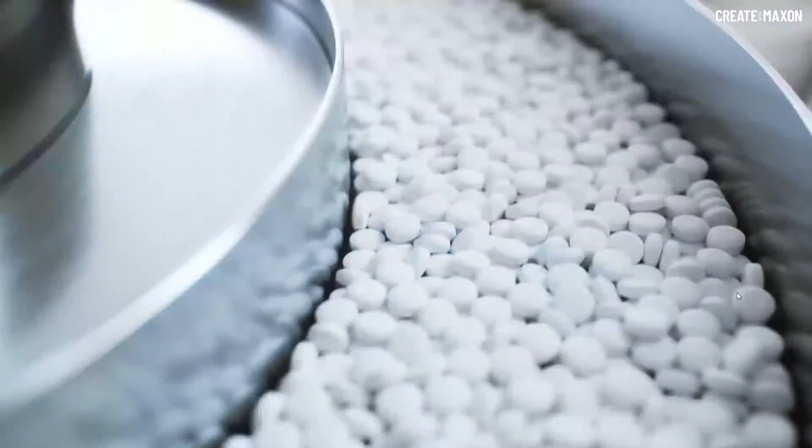Yeah, okay, that's it. I think what you can see here is that we are covering a big variety of things. You saw some Lego stuff we do, and then this photorealistic stuff, some commercial stuff. But I think what's most important to say is that all of these projects are commercial projects. So we are very focused on doing commercial projects. It's not that we have a lot of time to do spare time projects.

So our credo is learning while earning, to call it like this. And so we are always trying to get better with every paid project. I think that's a good way to go, because it's always good if you get paid for something and also can deliver great stuff.

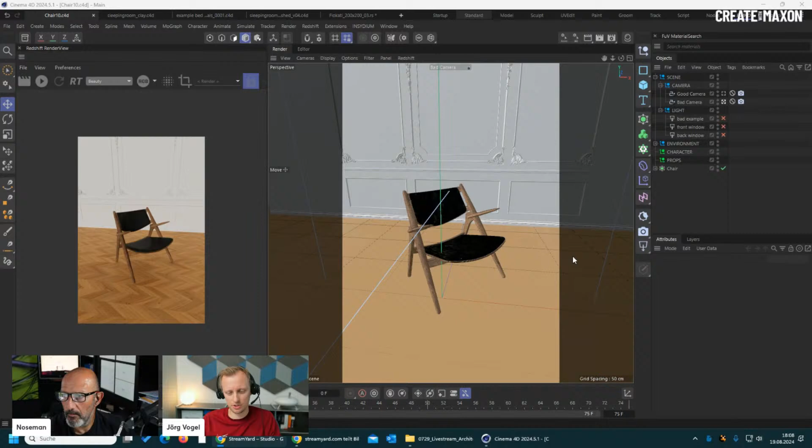So I don't know if there are any questions from you, Athanasios, or no. I will make sure to interrupt you if there are any urgent questions.

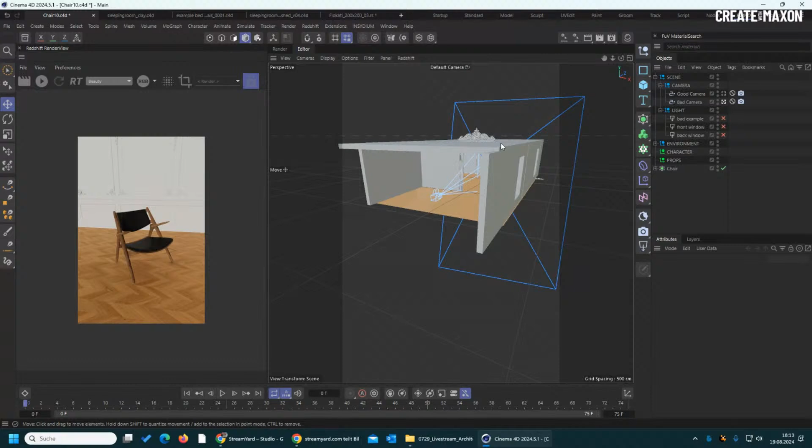So let's switch over to Cinema 4D so I can show you what I mean. I prepared a very basic test scene here. It's more or less kitbashed together. You have some ornaments here I downloaded from somewhere, we have the door here, and I placed this wonderful chair right in the middle of the room.

So in terms of composition, if we're now trying to make a good composition just from this chair, I just said, okay, we can go with a bad camera. I would call this one a bad composition. It's not showing anything. It's the standard focal length of 36. If you open scenes from other people, you always see they don't even care about the focal length. They just keep the standard and that's it, and then place it just somewhere so you see the chair. That's it. And if you now hit rendering,

we don't have light here at the moment. That's just the auto light, but you can see, okay, it's showing the chair, but it's not really showing anything else except for the chair. That's it. So we have now a bad composition, and now let's combine this also with some bad lighting. The recipe for the perfect bad lighting is to put it right in the back of your camera. So I prepared this here as a bad example.

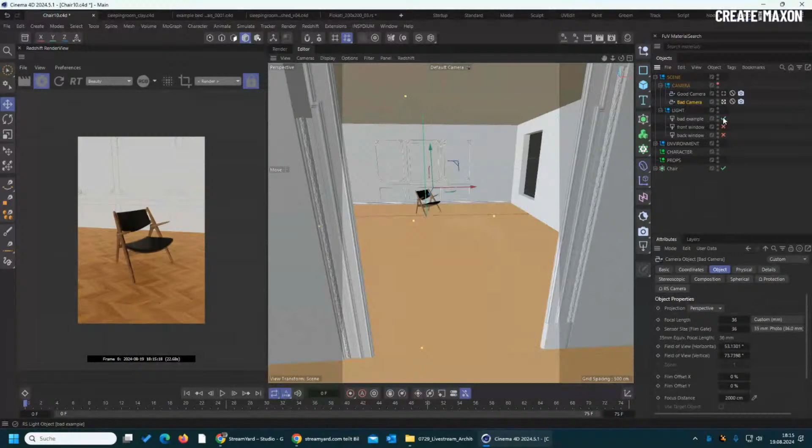So at the moment we have our camera, you can see it. We have the camera here, and the light is coming right from here, so it's mainly coming directly from the back. And what you can see now is we don't have a really good perspective, and we don't have really good light, because we don't have shadows; the object is just covering all the shadows we get, because the light is coming right from the back of the camera. That's not what we are aiming for. So let's go back and think about what could be more appealing.

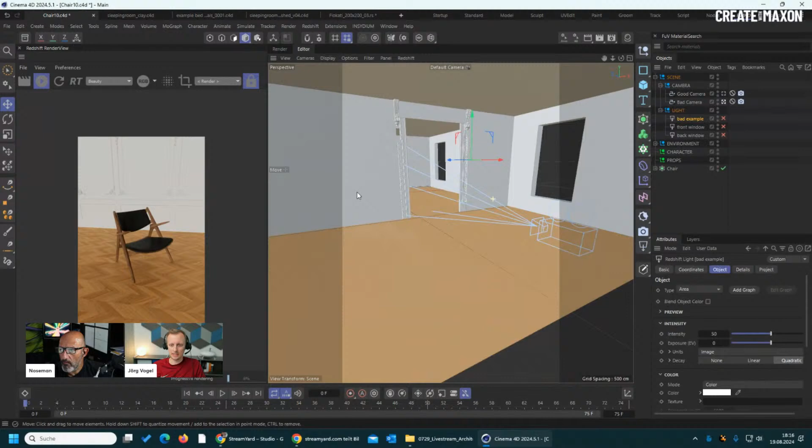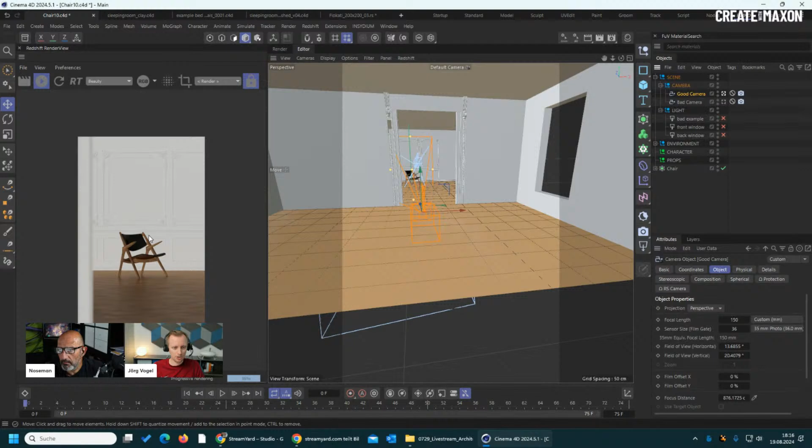A good way to get a good product shot, first of all, is to have a bigger focal length. So when we start here with a focal length of 150 millimeters, for example, and just get a little bit of the door frame here in the front, we get a little bit of depth of field, we get some depth into the image, and it's looking much more interesting. What also helps to get to those perspectives is the composition tab here. You can enable, for example, a grid, and center it, or you can use a golden section or triangles. Just some helpers that can help you get to an interesting composition.

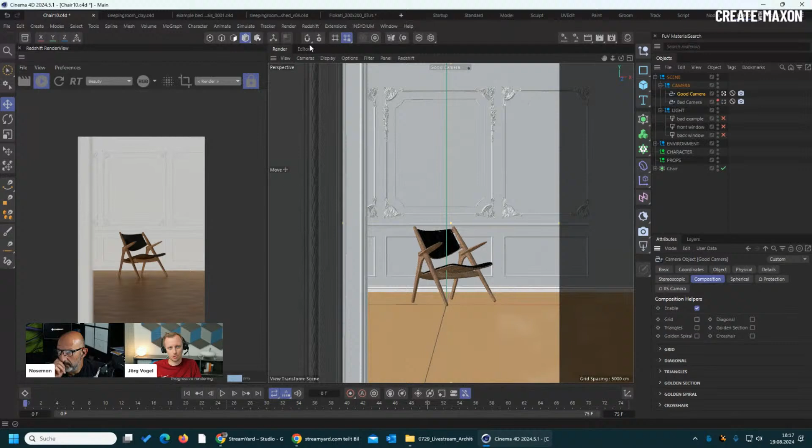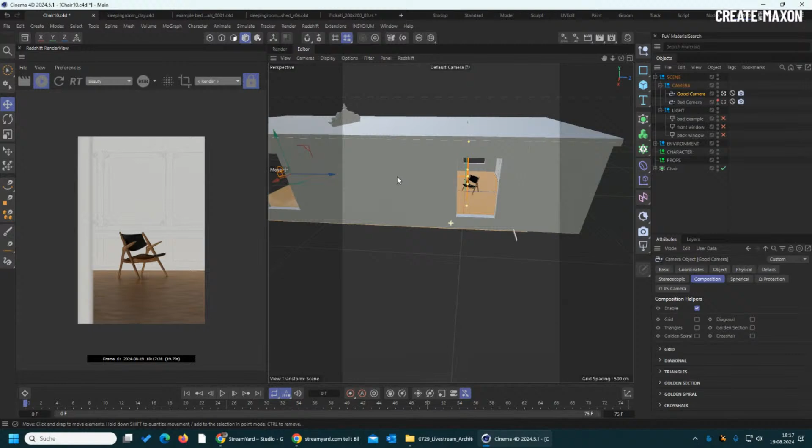So now we have this. We still have auto light, and what we said is point 2 after the composition is the lighting. So what I did here is we have a window directly from the side, and I'm not telling you that you should always put a light from the side of your object, but it's always a good starting point not to put lights just somewhere, but put it 90 degrees to your camera. This is just a safe way, because most of the time it will give you a good starting point.

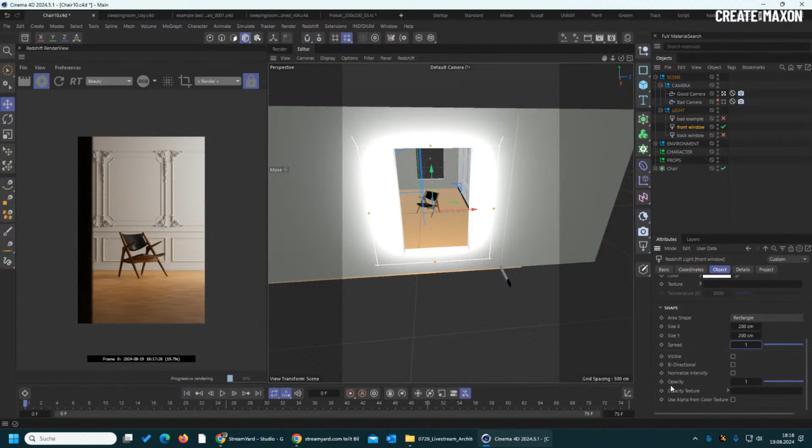So I will just turn on a light, an area light. It's nothing fancy. It's just an area light with not a spread of 1, but a spread of 0.5. You can see the difference. It's a little bit more focused on the chair, because the spread is not so wide. So we can do it like this, and now you see, okay, we don't have any light in this room, so it's a little bit dark.

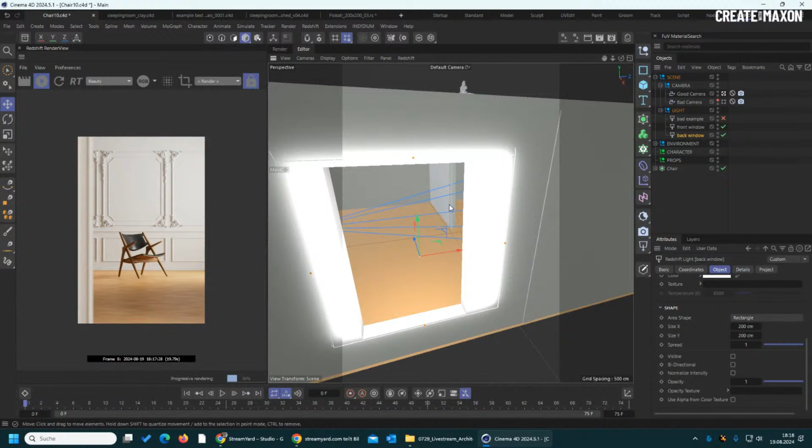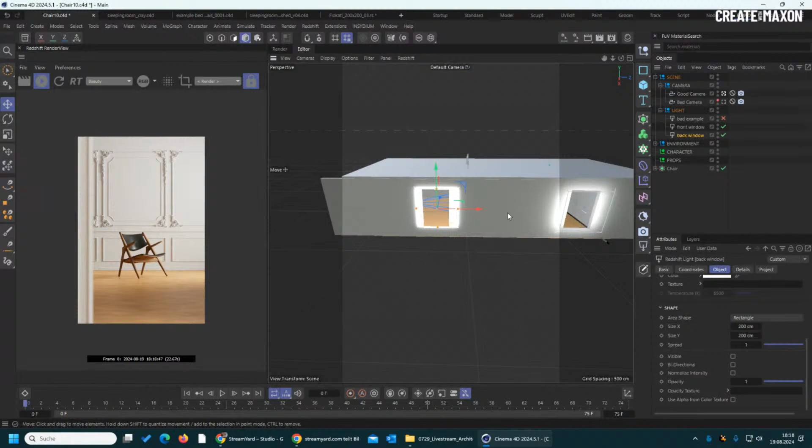So we have another light coming from this window, and it will just make this room brighter, and we will end up with a good composition and lighting. And it's pretty simple. Good lighting doesn't have to be very complicated. It's just 2 area lights and 2 rooms with 2 holes. You see it's even open here on the back. So I think it's really simple, and you see what's the magic about good composition and good lighting, because it's exactly the same object, but if you go for this, you get a completely different quality of image out of it.

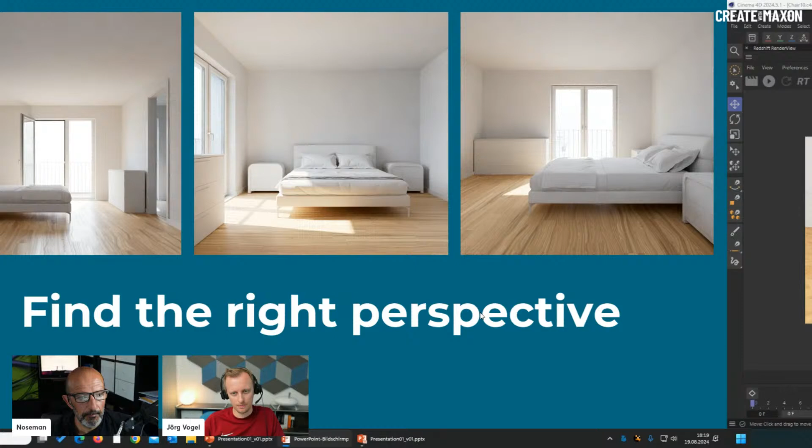So far for this one. So this was a little bit more overall, and I will now switch to this bedroom scene we saw here at the beginning. And just want to show you how we proceed with such a project. So let me again switch over here, and we will just start over with a blank scene. So I will really show you the basics how we work here.

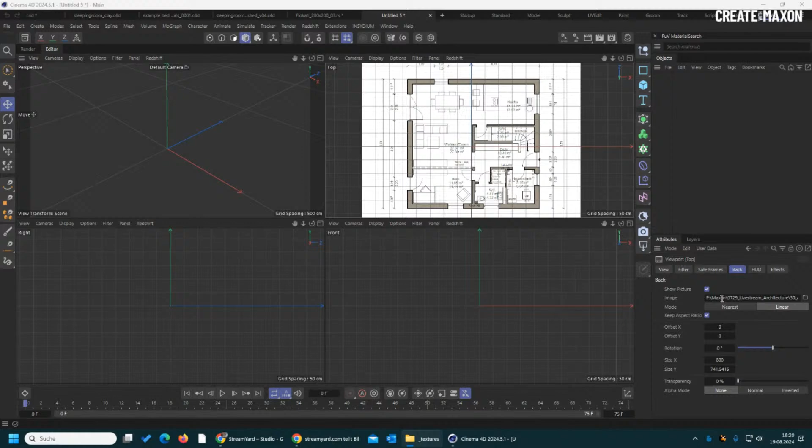So normally when you start, you need something like a blueprint. And you can just go to your top view, for example, and go to the viewport settings with Shift V, and then you go to back, and here you can, let me just go to this texture here, one moment. You can just put in some blueprint I prepared, and here you go. Now you can just model your stuff.

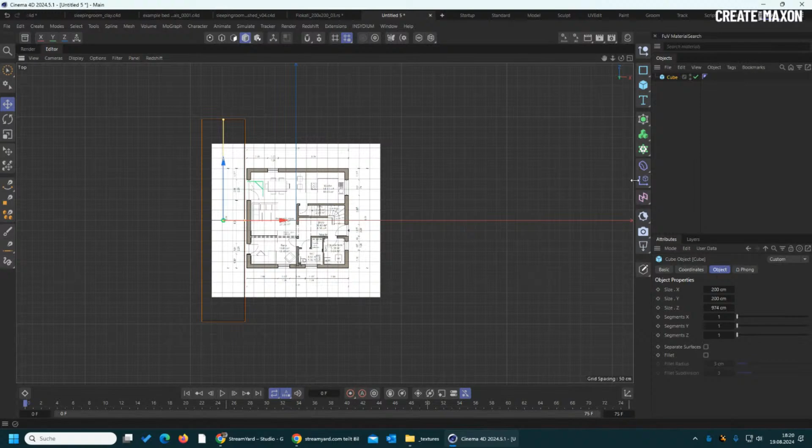The problem now what you have is that the scale is incorrect. So for example, we have here 9.74 meters. So if we just type in here 974, you can see it's totally off scale. We can now go here and adjust the size and the offset, for example. But we find this really annoying.

So what we did here is that we, let me just remove this one here, that we have a plugin written. It's called the BlueprintImporter. And you can just switch the standard alignment. You can say, put me an image into the luminance channel, and also which type of material you want to use. I would just use the old Cinema 4D standard material. And then we go to import image, and here we have the blueprint.

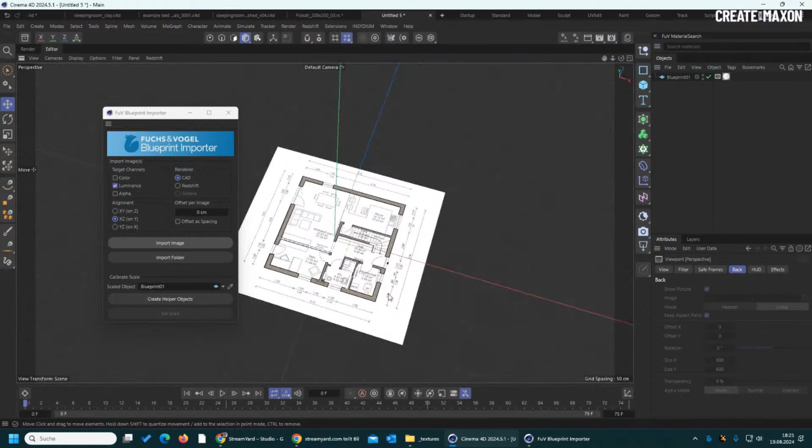And now we have a plane here with the material attached with a display tag. So you can also see it in the top view, for example. So it has an override here for constant shading. But we also have the problem here again that it's not scaled properly. But here we have the create helper object.

You can see it's just a null object that appears here, and we can just set it somewhere here, and we can set this one to here. So we have now measured the distance here, and then we say just set scale and set this to 974, and that's it. I think 974. We can just check it by putting a cube here, and you can see it aligns perfectly. So that's step number 1 to start with the modeling of the room.

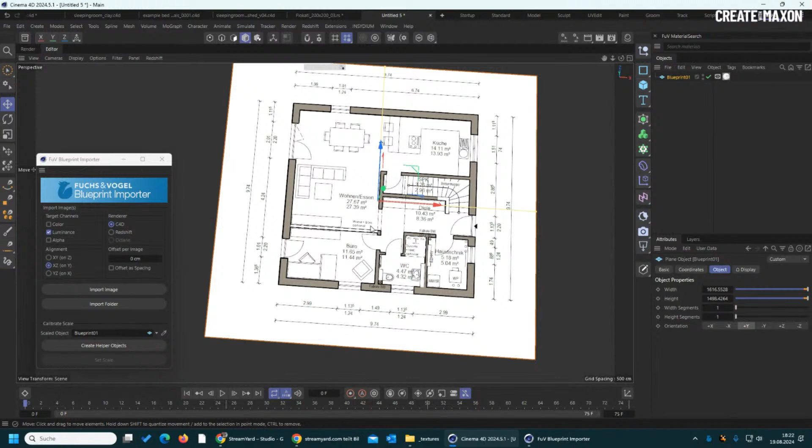And I won't show you how to model everything here. I would just show you how we would build one room, for example, because most of the time you won't show everything. It's more like, okay, let's show the office or the dining or the kitchen. So

we just do it by creating some spline here. So just really rough, go to the edges here and close the spline. So what you can see now, it's not perfect. You don't have 90-degree angles here. And I think the fastest way to align them is just to copy 2 of them and then scale them. Like you click on the smallest one and scale them down and scale them here. Yeah, as far as I can see, I was pretty good with those 2 because they are already 0.

You could also use the scale tool, for example, just scale it down to 0. So now you have perfectly aligned 90-degree angles. That's really good. That's what we want to have. And now we can align everything here. Perfect. Then we can create an outline. Perfect. Just need to adjust it here a little bit and here a little bit.

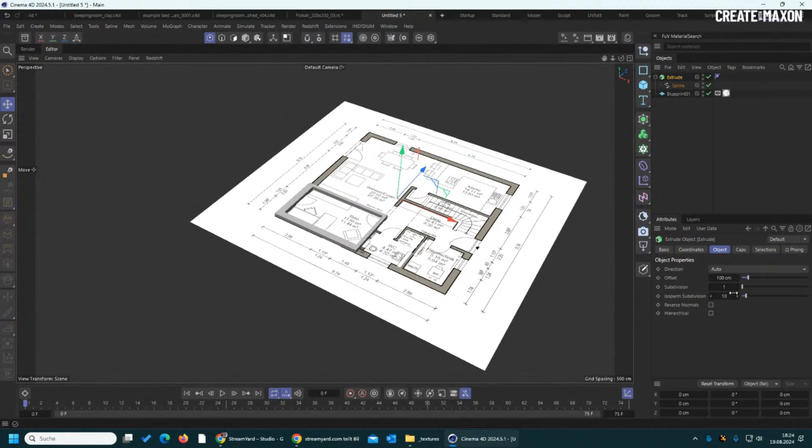And that's it. Let's put this into an extrude NURB, and let's say we have a height of 270 centimeters. And what you see now, it's facing in the wrong direction, but that is not really a problem because we can just reverse the sequence of the spline. And so we get it in the right direction.

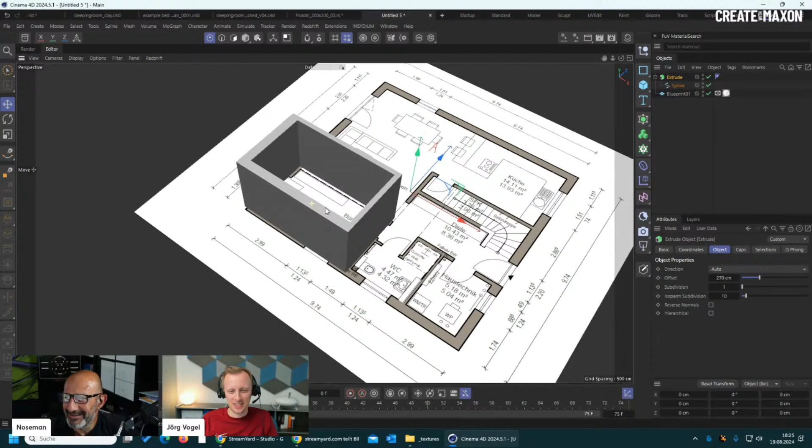One interjection here. Whenever someone says to our viewers, I'm going to put it into an extrude NURBS, that means they've been using Cinema 4D for a long time. That's my comment. Yeah, I'm old. I'm trying to get used to the new terms. Okay, so I'm using an extrude. Yeah, great.

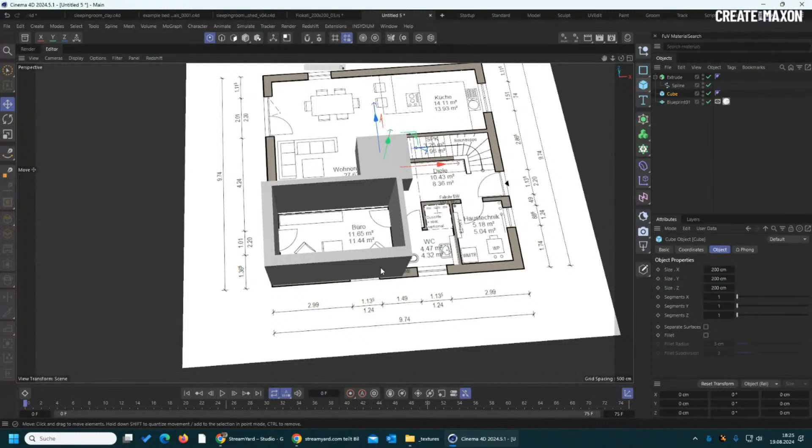So what's the next part? The next part is to put in some holes into the walls, like for the windows. And I think we have a door here, and this is also a big window, like a door. So we just get a cube, for example, and we see here that it has the size of 101. And I think the other one should be the height, so it's 220. And what you see now is that it's not aligned to the floor.

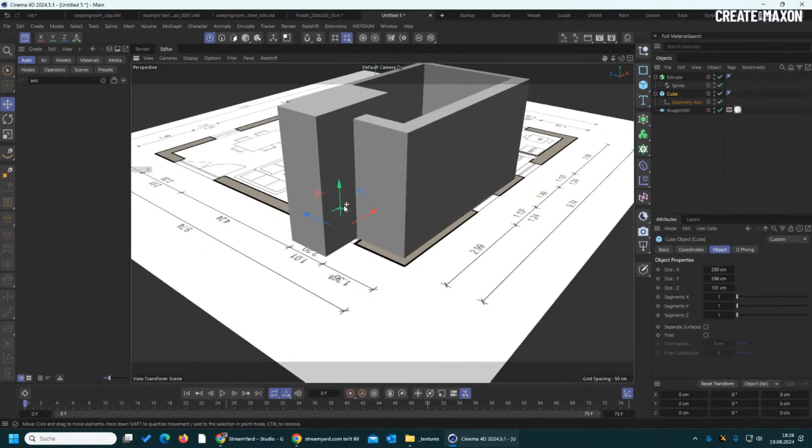So when I'm doing this, you can see it's always spreading in both directions from my axis. So there is a really handy capsule you can use. It's called Geometry Axis, and when you put it here, you can just set the Y-axis, so it's just an offset for the axis, but you keep your cube editable. So you now can just adjust the height without moving the cube into both directions. So that's really handy for something like this.

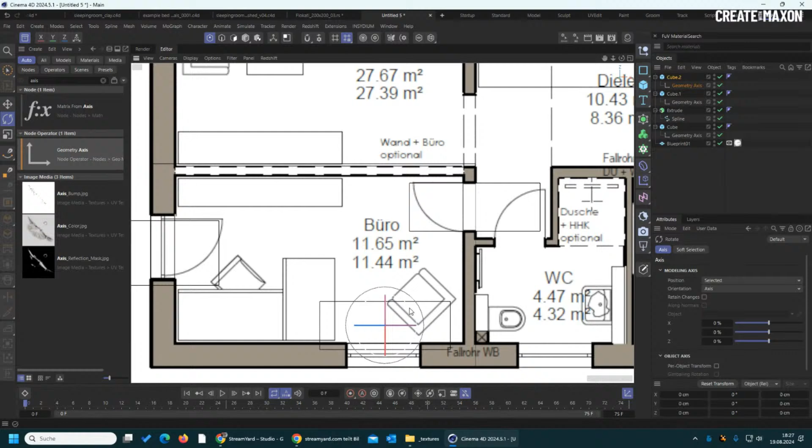So we have this door here. We have the door, I think it's around 75, if I'm right. And yeah, the height, we can just leave it. We will just make it a rough model. And again, we have here something like, I don't know, I think that's it. And in the height, we have 124.

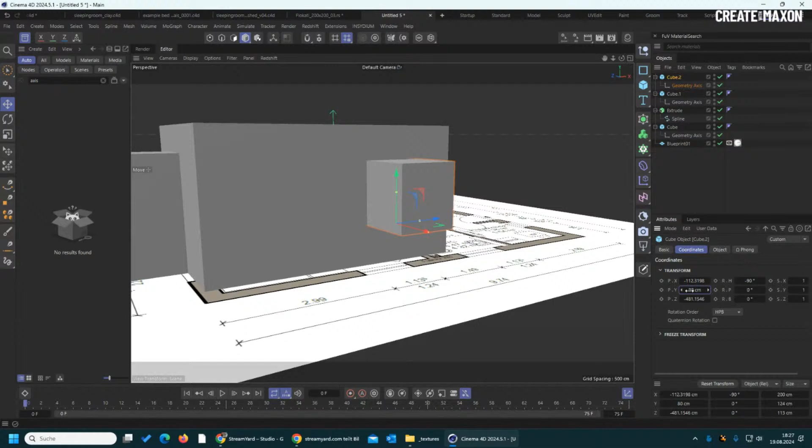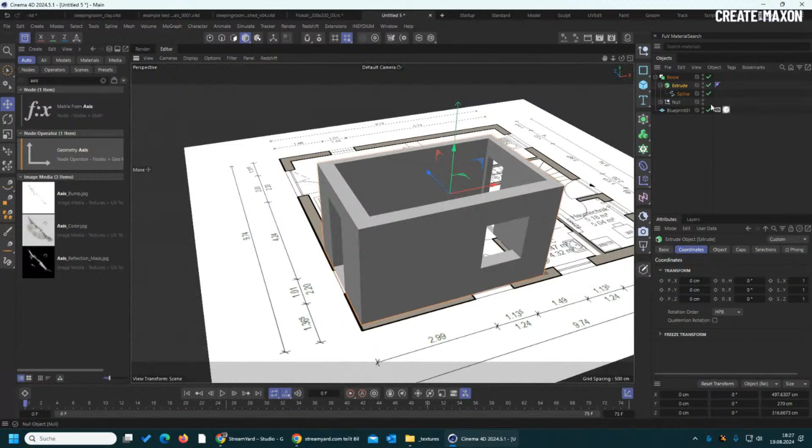Exactly, and I think the window will be at a height of around 80 centimeters. That's also really handy with this axis, because you can just move it from the bottom of the window. So we now take a Boole, and we can just group all the windows together, put them here, and put the rest here, and there we are. I would just pull them a little bit down, so we have gaps in between those doors here. So that's it for the holes.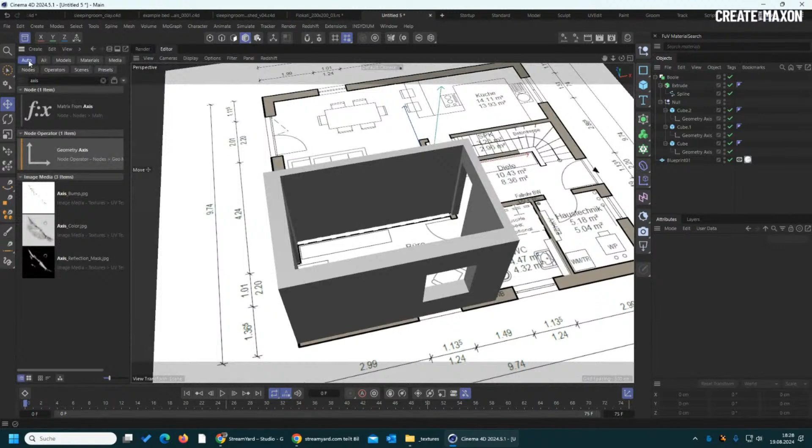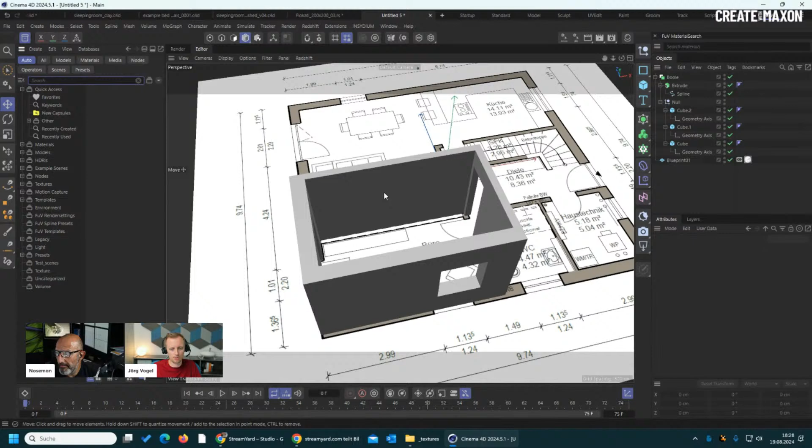I really want to highlight the asset browser here. A few years ago, there was not so much stuff in there you could really use for your commercial work, but it's a really growing library, with the materials, and also there are tons of new models. There are reworked old models for Redshift, so I really recommend looking at that first before you head out to, I don't know, TurboSquid or 3D Sky or whatever.

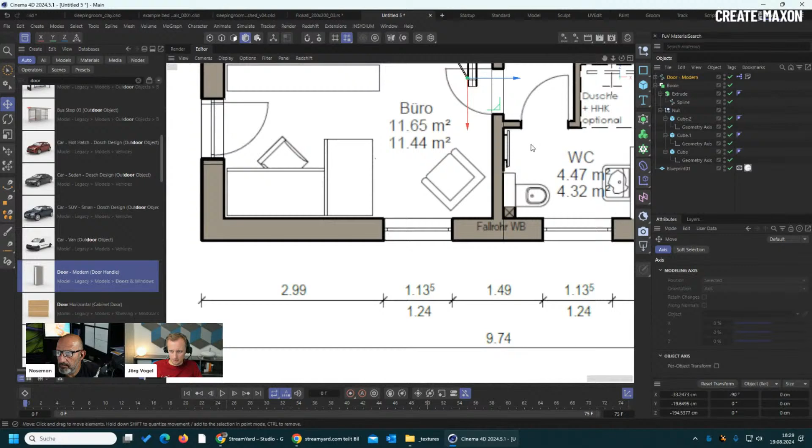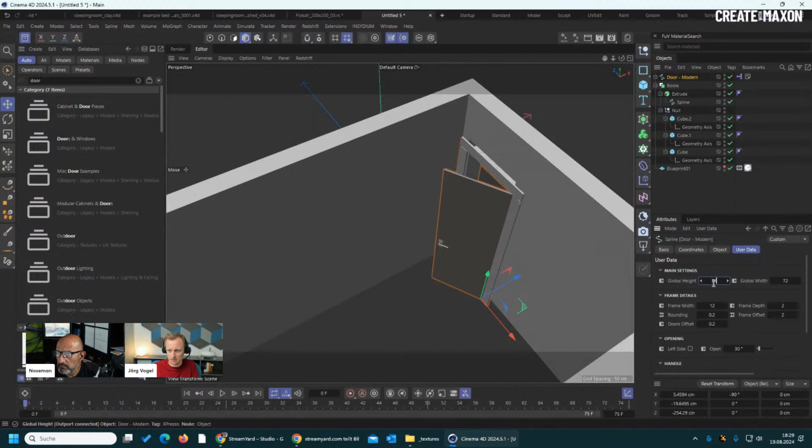So what we can use here, for example, is a door object, and that's really cool because you can just align it here. I would just hide the blueprint for this, and we can just put the door somewhere like here, and then it has a rig already implemented, so you can adjust the width here, and then we have also a slider for the depth, and of course the height. Yeah, that was a little bit too much, I think. Yeah, something like this. And that's it.

So we already have our door here. You can also open and close it. So that's a really good rig. I don't know since when it is there, but it's really handy because, as you can see here, you can really fast apply your door here.

For windows and other things, I recommend you build them by yourself, or you can go to the internet. There are tons of free stuff. There are tons of stuff you can buy. Over the years, we just built a library of 3D models. So yeah, we just place some windows there and scale them properly. I won't show this here because it's just getting some models, shading them and dropping them into the scene. That's nothing really special. I'm just focusing here on some techniques that can be useful for everybody, and don't want to waste so much time on this.

So what you can also do here, because we still need a ceiling, we can just use the spline we already used here and just duplicate it and put this one also into an extrude. It's important to set the offset to 0, and move this one right to the top. We can just move it a little bit like this, so it's penetrating here a little bit.

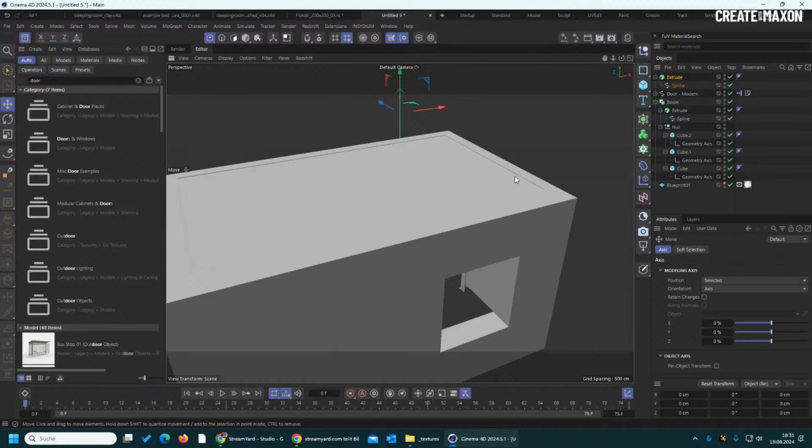So the problem with ceilings is that they are always in your way when you want to work. So what you can do now, which is a really good trick, is just go to the options of your viewport and turn on backface culling. And as you can see, nothing really happens, but I would just put a cube here on the top. So when I'm now looking from beneath the ceiling, you can see that the ceiling is gone. I just see through it. That's because the normals are facing up here. And backface culling will make the back of the polygons invisible. So when you're looking through the back of a polygon, it will just be invisible.

And that's just the wrong direction. So I tried this reverse normal thing, but it doesn't work. So what we can do here also is reverse sequence. And so it's gone, but it's not really gone because you can see it already here.

So the good thing about this workflow is you still have the ceiling when you're in a room. That is really good, because otherwise you're just looking into the sky. But when you're looking from the outside, you can see that it's not really showing. So that's a little bit the pro, compared with just turning off the visibility, because then it's also not seen from the inside.

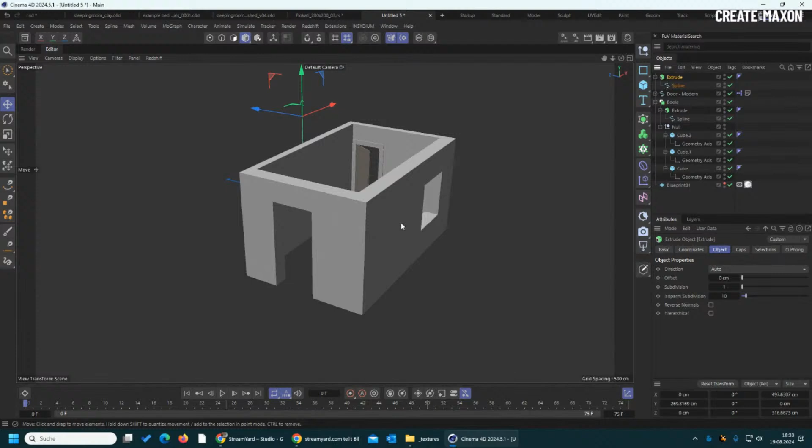This can be really handy, and you don't have to care about it. If you turn the visibility for rendering also off, sometimes you forget to turn it on, and that's a little bit annoying. Yeah, so I think that's it about the basics on how you build it.

What you can also do here, that's maybe something you need, is that you can make this. Normally around this edge, you have this kind of wooden plank you line here.

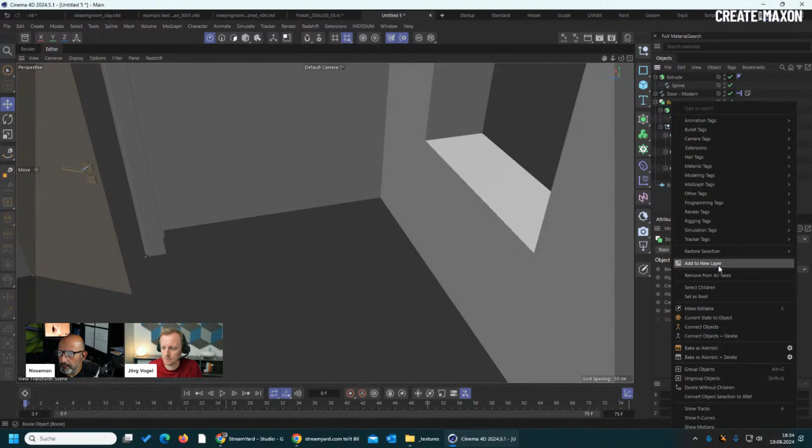So you can do it just by doing a current state to object, take this geometry and then select the edges. So we have all the edges here already, and then we say edge to spline, and now we have a spline. We can delete everything else here, and now we have the spline here.

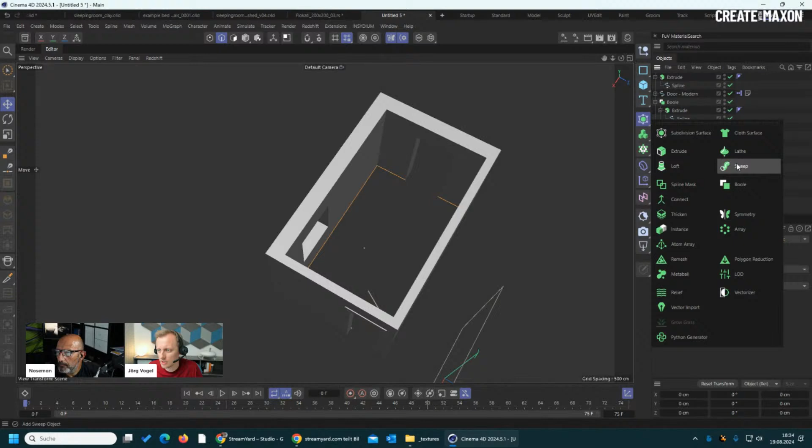And as easy as it is, we can also add a rectangle here and put this all in a sweep. So this looks totally horrible. And here again, we can aim for this geometry axis. I will just turn this off here so we can see everything. What we're going to do is just sweep this rectangle around here, so we get this profile.

And to do this properly, we need to put the geometry axis to one of the vertices of this rectangle. And we can do it by just converting this one here and moving the axis around. You can do this, but I really like this procedural way where you can leave everything parametric as long as you need it.

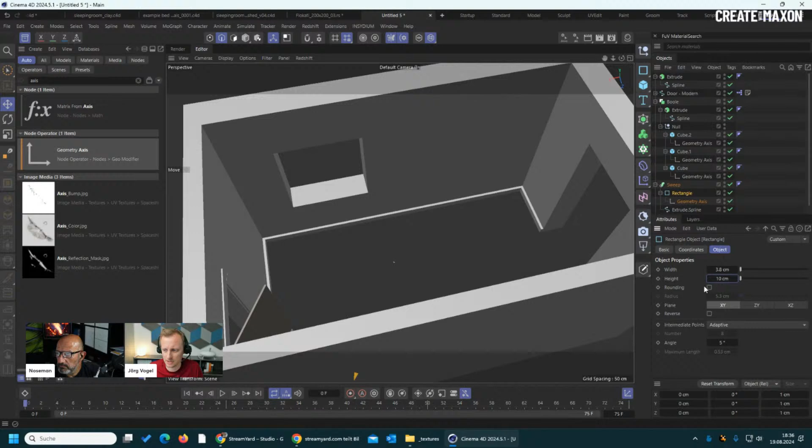So what you can do here now is that you can just move the edge around and then turn it on again. And as you can see, we can now adjust this to something that's making a little bit more sense. For example, you can add some rounding here and maybe adjust the phong angle so it's breaking correctly. And so you now have this socket here around your room.

Now we need a floor, but normally you can just take a plane and that's it. Take this for the floor. And I think that's it. We are now ready to proceed with the next step. And the next step would be to get a good perspective.

So maybe that's a little bit not usual, but before we start looking for some reference image or something, we first try to find a good perspective in the room. So after that, when we know what we want to show, we can use some reference image that's exactly aiming for this outcome.

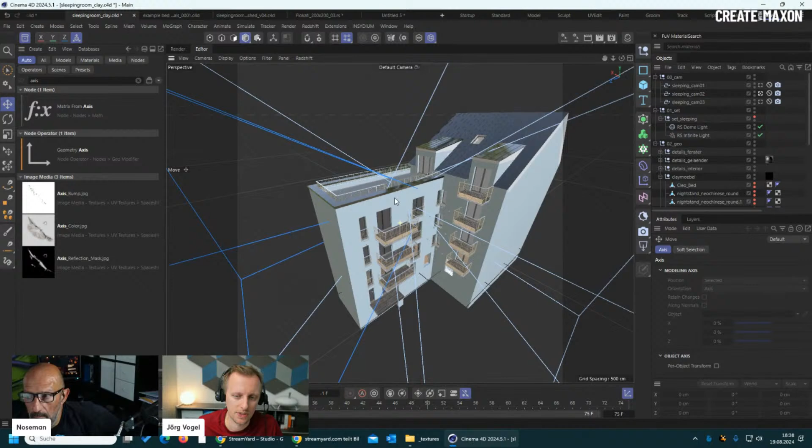So you can see here that we had different perspectives. I also have prepared this room. As you can see here, this is already a completely built house. We haven't only built this one room, but that's not because we have to render every room. We got some data from the architects, so we already had this, and we had to render also outside images. So if you have everything already, you just take this room and that's it.

So what we were trying here was to just find some camera angles, and as you can see here, it's a typical Munich housing because everything is very small. And as you can also see here, even if we are looking into the room, most of the cameras are outside of the room.

I think this one here is the wall of the room, and you can see all the cameras are outside of the room. So how does this work? Normally when your rooms are big enough, you don't have a problem.

But in this case, especially when you're visualizing buildings in Munich, because it's so expensive, they're normally just building small rooms. So what you can do is take a small focal length. That's the first thing you try. But when you're going under 20 or something, it's just distorting everything. You will see this as soon as you put some stuff in the room. So just lowering this is not really an option.

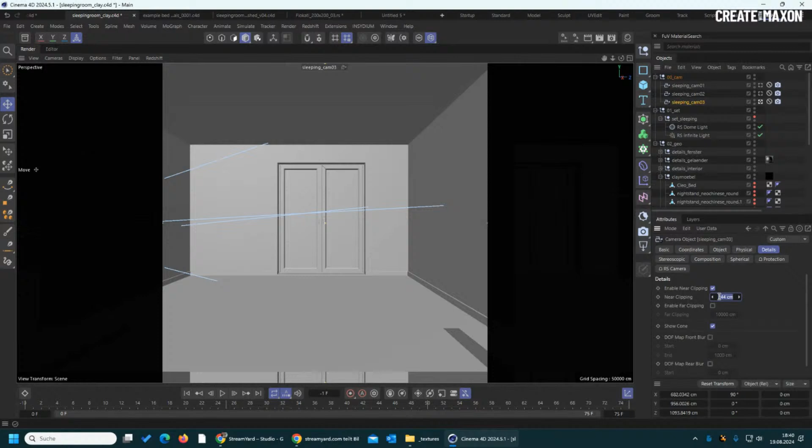What is really usual for this kind of visualization is that you can go into details and enable the near clipping. What it's doing is just clipping away things that are in front of your camera. You see this when you're sliding down. So actually the camera is outside of the room, but we are just clipping away the stuff, just as much as we need, because otherwise when you do it too much, you're also clipping away things like the floor or anything else. So just clip away as much as you want, and we did this with every camera, as you can see here, because otherwise there's just no way to get a good image here.

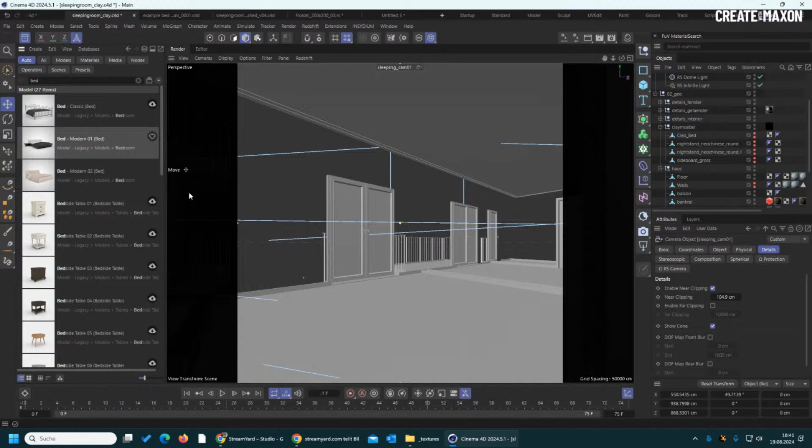And we also have some furniture here that can be really rough. So what you can do here, for example, is go to the asset library, and when you have a bed here, I just have to turn off the walls temporarily to place it. And we can just take this bed here. You already see that it's really small inside of here. So we can just take this one and put it right here. Maybe check some other perspective. You can see it's really small in here, so maybe we are aiming for a smaller bed. We can just scale it around.

And what I also do at this stage, we can just select child tags of the same type here and get rid of all the materials. Let's try it again. Yeah, so like this. So we're just working with some clay models, and as you can see, you can just populate it with some stuff because it's not really important what's in there. It's more about having some placeholders for a bed, for a cupboard or something like that.

So this was what we were doing here. You have the sideboard, you have those small things, and then you have this bed. That's all. We just put it in there to get a better feeling for the room and for the camera angles. We proposed to the client those 3 cameras, and he decided for this one. And if I load this layout here again, we can also render it shortly, because what we also did here is put some basic light in. As you can see, it's just a dome light and an infinite light.

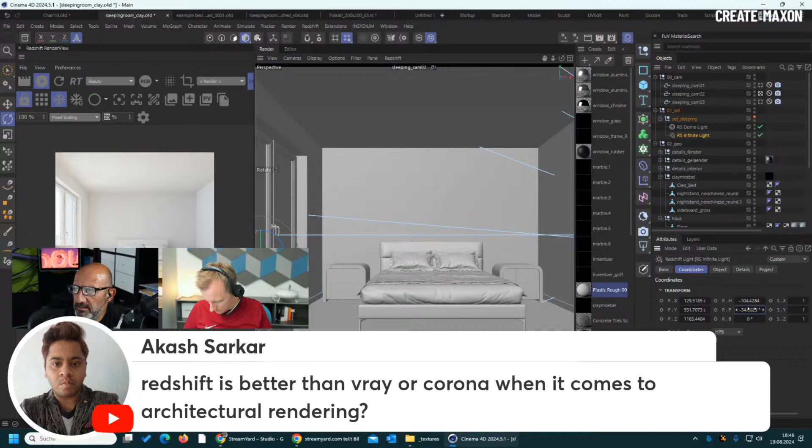We have a question, Jörg. Akash is asking, is Redshift better than V-Ray or Corona when it comes to architectural rendering? And I could rephrase this as, why is Redshift your preferred renderer, and how does it compare to other third-party renderers?

I personally cannot really judge Corona or V-Ray. I think these are both very good render engines. We switched from V-Ray, I don't know, 8 or 10 years ago, because it just wasn't a good implementation in Cinema 4D. I think that has changed a lot. A big part of our business is having a library. So when we switched to Redshift a few years ago, we were dedicated to this render engine, and we put all the effort into building up a Redshift library.

That's what I was trying to point out. It's not really about the render engine at the end of the day. If your compositing is not good, if your lighting is not good, if your modeling is not good, if your materials are not good, you can use whichever render engine you want. It won't get you a pleasant output. So I don't think one render engine will perform better than the other one.

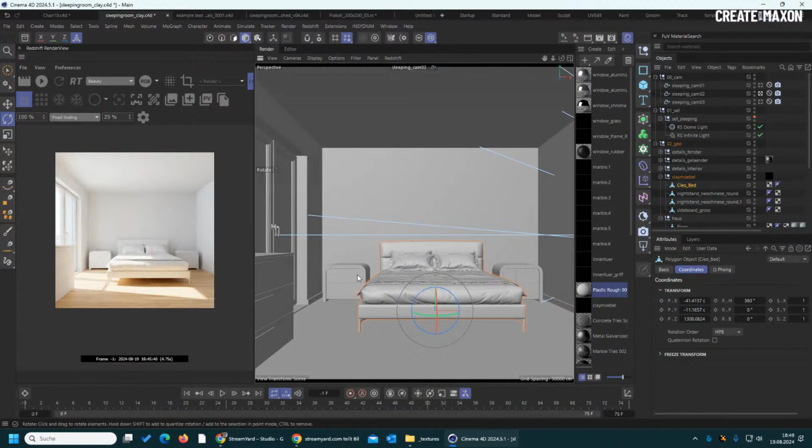All right. So we now have the perspective, and as I said, we started over by deleting everything again, because these were just stand-ins, like proxy geometry. You just need to get to the right perspective. So we were going with the middle one, as I told you.

The next part is the references. As you can see here, we don't use AI a lot for our work, and we don't really have much hardware set up for it internally. We just go to Bing Create or some free tool and type in some prompts that go in the direction. And as you can see, the closer you look into the images, the more you see that it's just rubbish.

But we took a lot from the right image. We also saw in the left image that putting a desk on the side is maybe not a good idea, because it will look more like a hotel room and not like an actual bedroom at your home. But what we also liked was the warm light coming from the outside, and the look of the lighting and all this indirect lighting. We really love that.

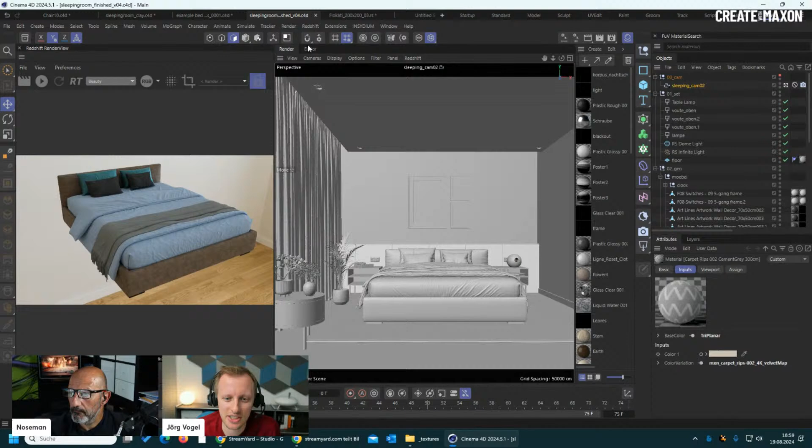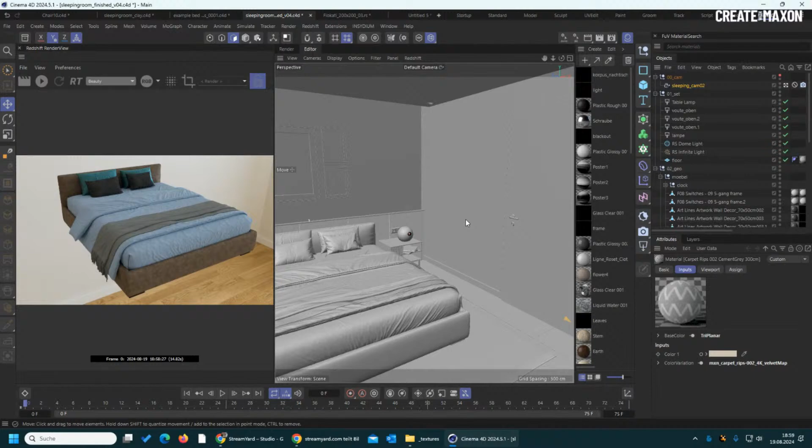This might be a little bit of a hard cut, from an empty room and some kind of clay bed here to the actual room. But I think our time here is also limited and we need to proceed. As you can see here, this image at the end was just a cube somewhere in nowhere. Because the lighter your scene is, the better the performance, and that's it.

So what you can see here, we just put some kind of bed here. We also have some indirect lighting coming from the top. I would just start the rendering. I also have the denoiser active, so you can see.

So as you can see here, a lot of elements we had in our reference we tried to replicate here, because you're always 100 times faster if you know what you're aiming for and not trying things out in 3D. Because then you put some effort in shading things and then you are like, nah, it doesn't look good, and throw it away. So you will waste a lot of time. So it's always good to have some really good references.

You can just use image search on the internet, or take your own pictures, or use AI. Totally free, but the better your reference and the better you know what you want to achieve, the faster you will be and the better the result will be.

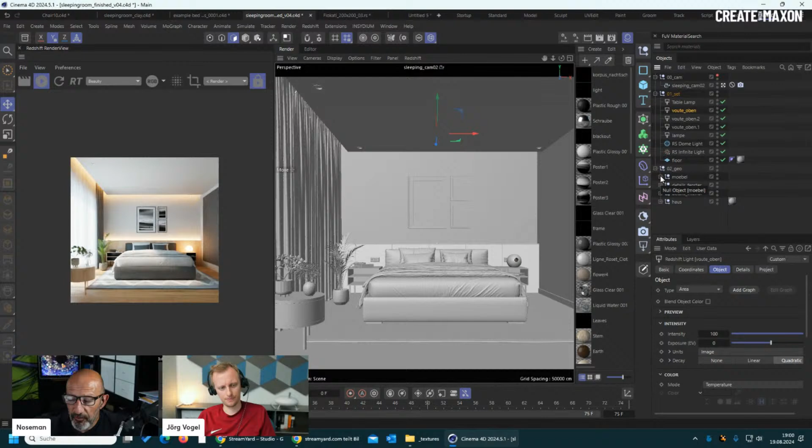One suggestion before you move on. I used to do that when I was in the UK. You go to any secondhand bookstore, and you can find some old architectural catalogs that have some beautiful images from different eras. And these books are usually extremely affordable because they're used and old. But the amount of reference you can get from older picture books is amazing.

Yeah, I can totally second this, always aim also for old stuff, because in terms of photography and composition, nothing has changed over the years. A good image 20 years ago is still a good image. Yeah, that's a good one.

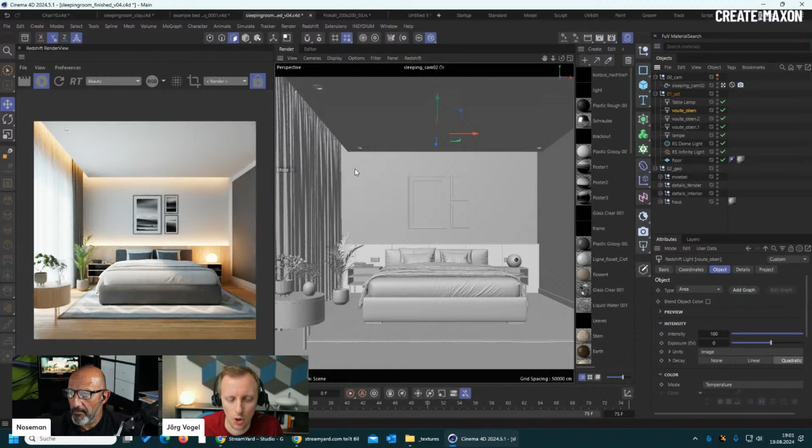All right, so now I will not really focus on the big setup here and the materials we use. I would say 90% of the materials we used here are just from the library, so it's nothing special. We also have some rug materials here. I'm not sure if that is exactly from the library, but we have some really good rug materials, and just put them on some kind of extruded plane, and it will work. That's the good thing about it.

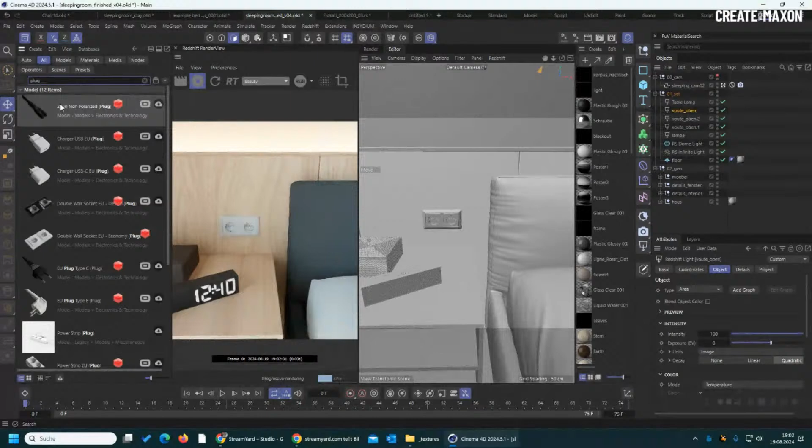You also have something like this, those plugs. I know I'm repeating here, but you can just go here, take them, and you will automatically get the placement tool, let it go, and you have stuff directly placed on the wall. I think it couldn't be any easier.

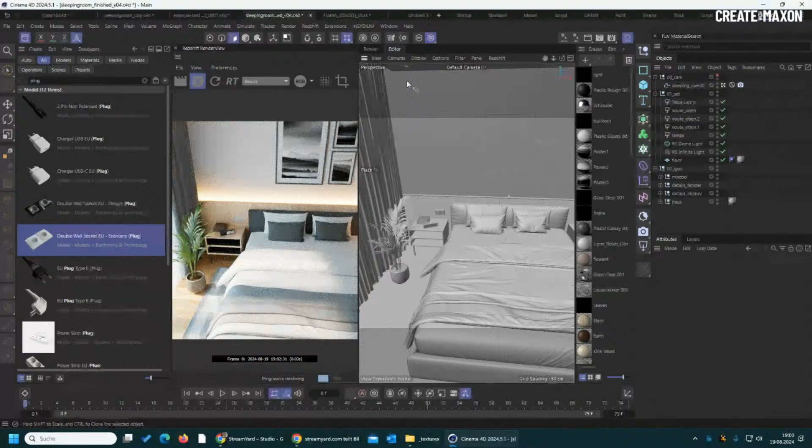Yeah, so what I want to show here a little bit is what we were doing for the light, like what I already showed in the previous scene. It hasn't changed a lot, but we just added a lot of artificial light from the inside, because it's always good. If you can see here, this is just the light coming from outside, and I think it's already looking quite good, but it's still a little bit dead.

So you want to always turn on lights in your architectural visualization, because this brings light and life to your scene, I think. So what we did here, we just have these indirect lights. We have one at the back from the bottom. We have one coming from the top, and I can show you this. It's nothing really, not a big magic.

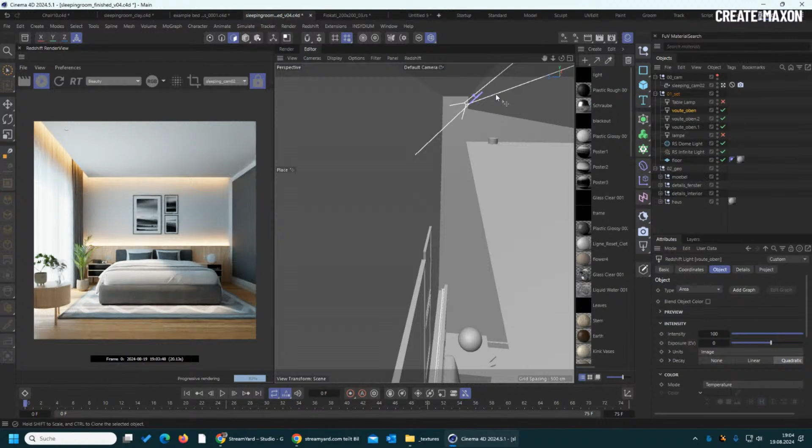It's just an area light pointing to the wall, and here a small area light pointing to this wall, and then we have an area light here pointing to the curtain. So you get this kind of stuff, and they are really warm. We have a temperature here of 2800 Kelvin. That's really warm.

That's what I was talking about, when you know what you're doing. As you can see here, that's our ambient dome light. It's really blue, but it gives a really good contrast to this really warm sunlight. So mixing it with this blue will give you this really cold look in the indirect lit area, but still a warm look where the sun comes from. So that's it.

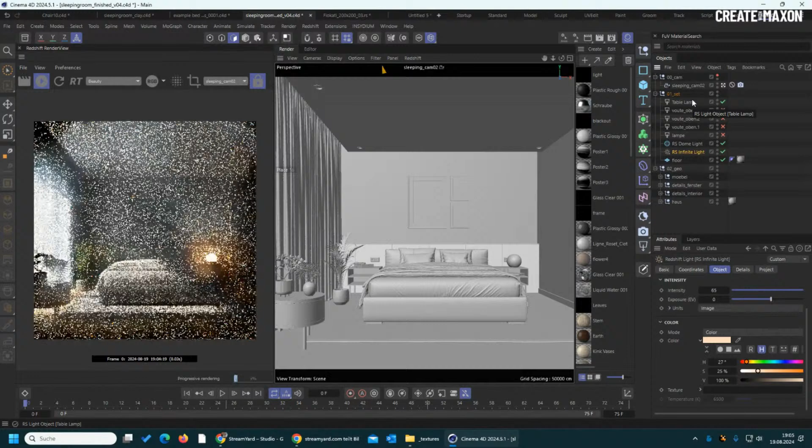And then we have this table lamp here. This is just a mesh light. And we also put a small light here in front of the normal lamp you can see here, just to make a little bit more light in the room, just fake it a little bit. We can maybe make a quick comparison. So this is without, and this is with. You see that it's just making it a little bit warmer in this particular part of the image.

Yeah, and that's it overall. You can just put it right there, and at the end there will be some post-production I can show you, but maybe that's something I will cover in the next stream we have, in 3 weeks.

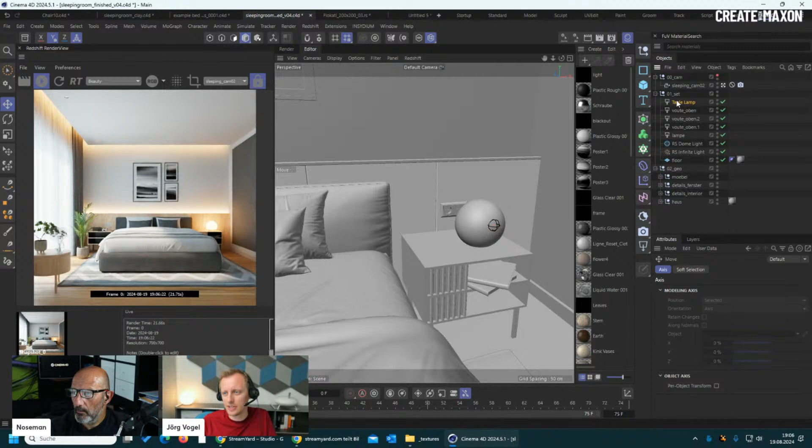But what I want to show you here is another thing that is really good, because when we announced the stream, I also wanted to show different lighting situations. You have this, I would call this a day situation, even if there is a lot of artificial light inside here. But what about a night situation? Now we can go here and adjust the lights, and of course we can do this, but there is also another way we can achieve it.

A good thing we can do are light groups. That's really cool, because you can group your lights and make some AOV passes that just include the lights you put into the group. So what I did here, I made a group: you can just click here and add new light group, and then put in test, for example, and this light will be added to the light group test.

I will just add it back to the interior light group. I added every interior light that we have here into this AOV interior group. Then I have this group called sky, and this group called sun. So when I go to the Redshift render settings, normally it's on basic, so you don't really see any AOVs. So first, go to advanced, and then you have the AOVs here.

You can go to show AOV manager. What we want now is to render the beauty pass, and normally that's on all, and we want to render all the light groups. We can tick them each, or we can just say all light groups. So now it will render all the light groups here.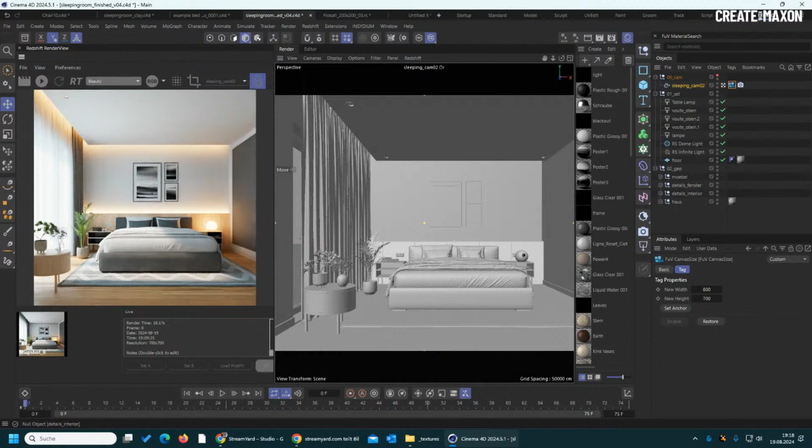And we also have our Flokati Carpet package available. It's volume 1, even though there is no volume 2, but maybe at some point we will release some volumes, I don't know. And what is really cool about this one is that we have a bunch of carpets in different sizes already as Redshift proxies. So you can see it here, and there's also materials applied and everything.

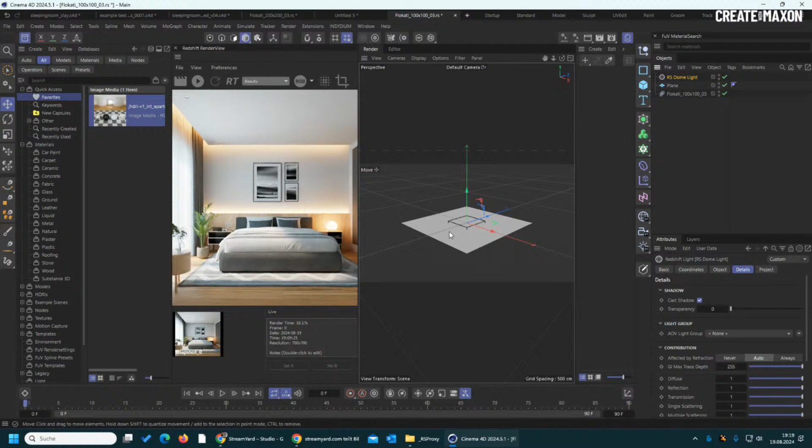You just drop your proxy here, and then you go like I showed here, put in a light, or not. I don't know. Did you break it? Yeah, maybe I broke it. Never mind. We just take this one here. There it is.

And as you can see, they are already pre-compiled. It's very fast. It's very detailed. You can see it's really detailed hair. We have them going from 60 to 90 centimeters up to, I don't know, like 3 to 4 meters. And they are in different shapes, like a round one. It's really good if you need some realistic Flokati carpets in your scene. It can help a lot.

And you see we scattered them and prepared them. It's like millions of hairs there, and paired with some good lighting, it will really give you a little bit of realism in your scene, because it has a lot of details.